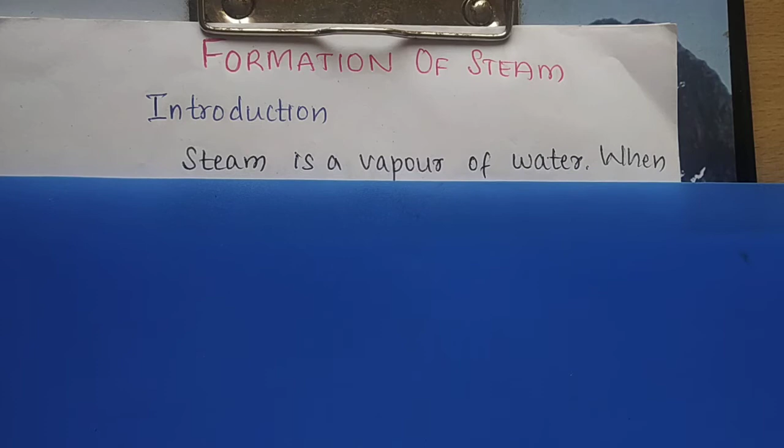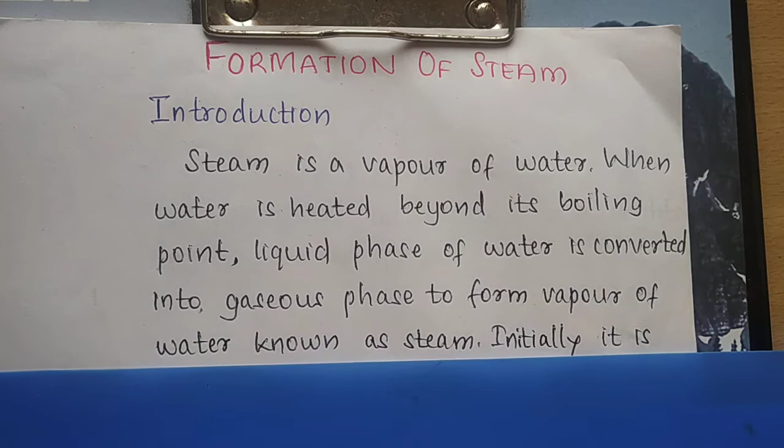Steam is a vapor of water when water is heated beyond its boiling point. If I heat this water beyond its boiling point, the liquid phase of water is converted into gaseous phase to form vapor of water known as steam. So when I heat this water, what will happen? The water is converted into steam.

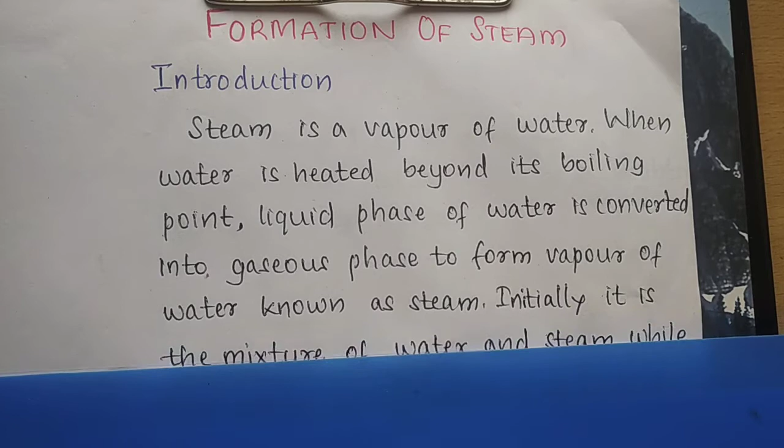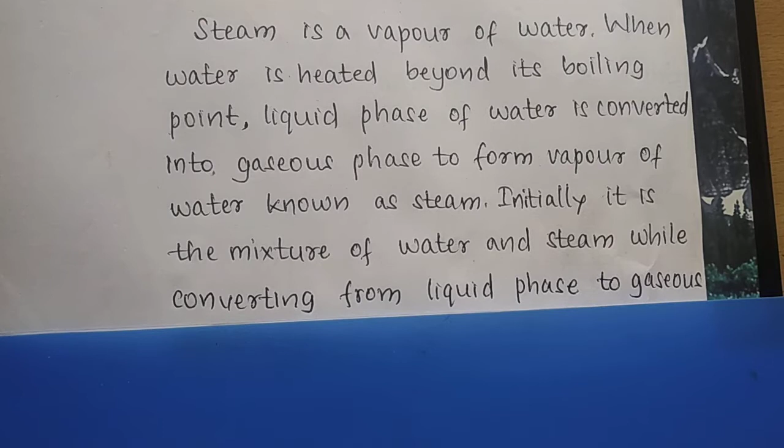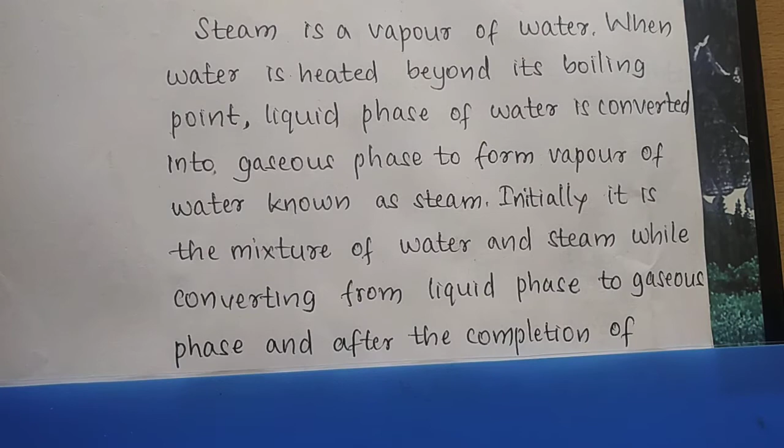Beyond its boiling point, initially it is a mixture of water and steam while converting from liquid phase to gaseous phase. So when converting this water from liquid phase to gaseous phase, initially it exists in both phases, that is water and steam. Then we convert from this mixture of water and vapor into the gaseous phase, that is steam. So converting from liquid phase to gaseous phase, and after the completion of the vaporization process, it exists in pure form - purely in the form of steam.

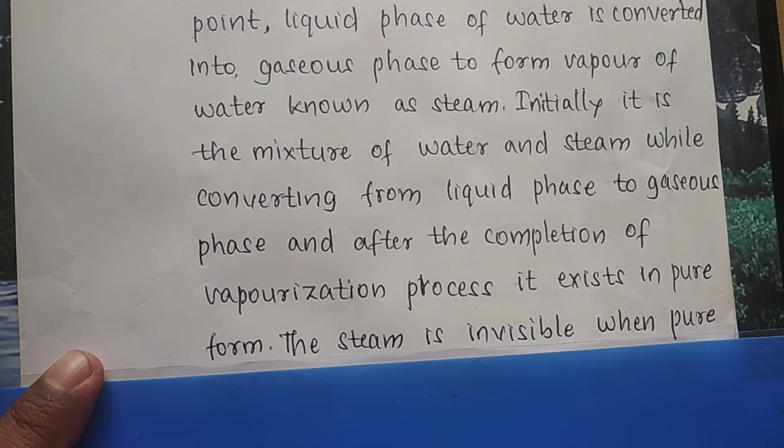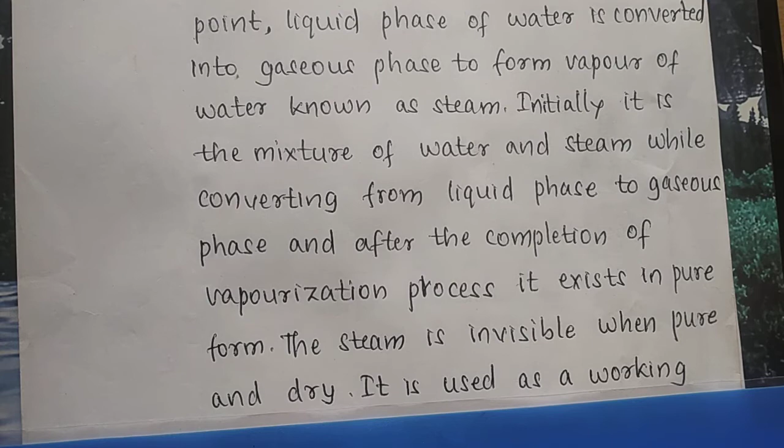The steam is invisible when pure and dry, so we are not able to view it when it is pure and dry. It is used as a working substance in the operation of steam engines and steam turbines.

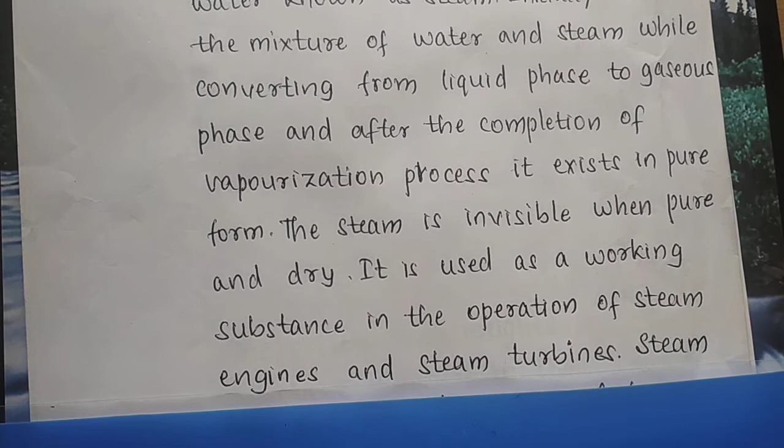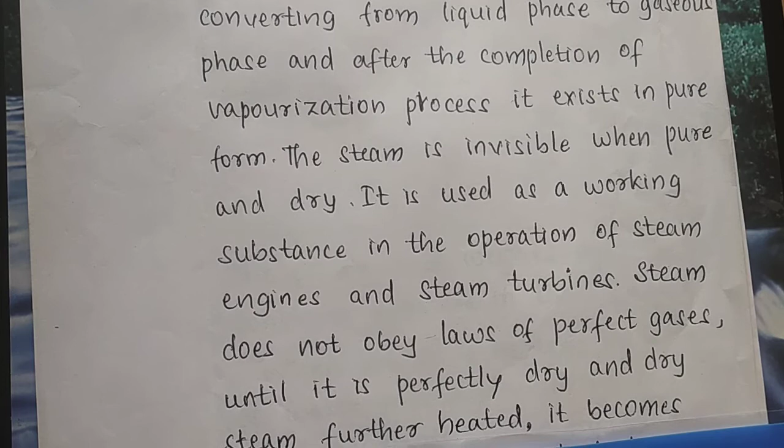Until it is perfectly dry and dry steam is further heated, it does not obey these gas laws. And dry steam, when further heated, becomes superheated vapor, which behaves more or less like a perfect gas.

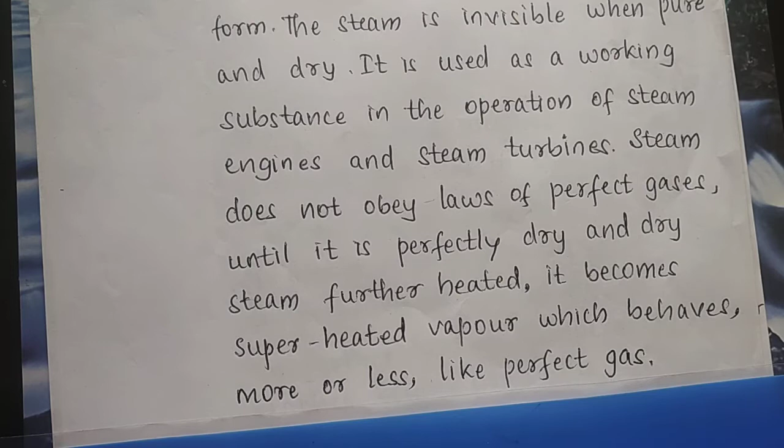Now let us see how steam is formed - formation of steam at constant pressure, or under constant pressure.

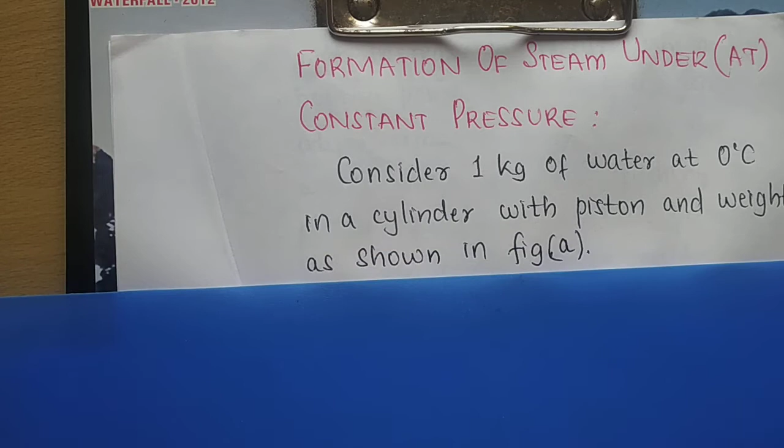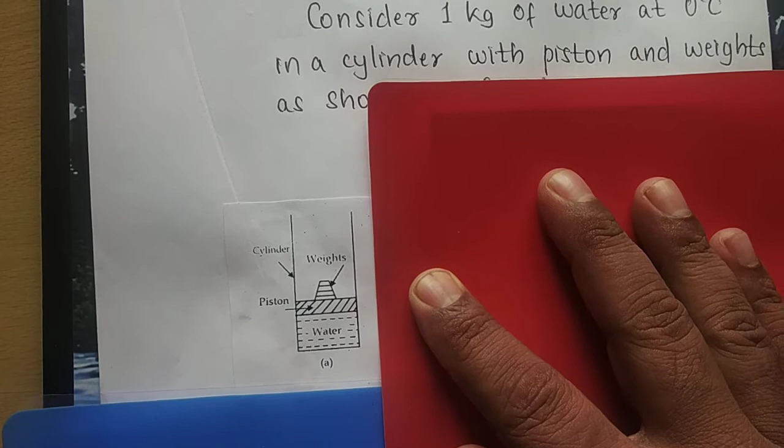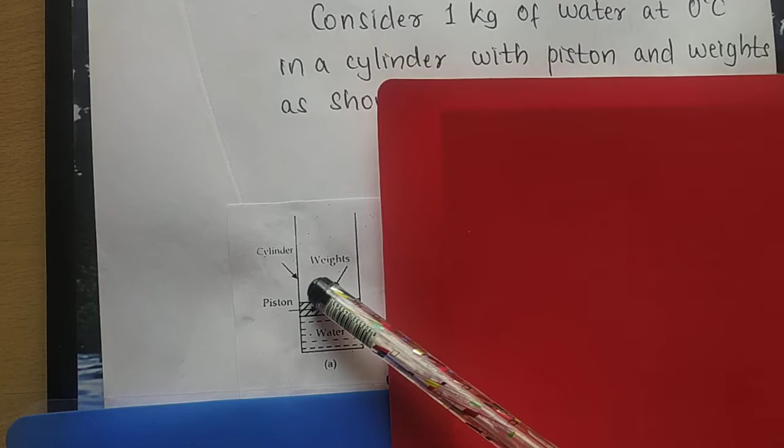So figure A I will show you now. In this figure A, I am showing you all the figures, but let us concentrate only on the first figure. Let us see the first figure now, I will show only this first figure. So I have got 1 kg of water, and this 1 kg of water is filled in a cylinder. A piston is there, weights are applied onto it, so 1 kg of water is filled inside.

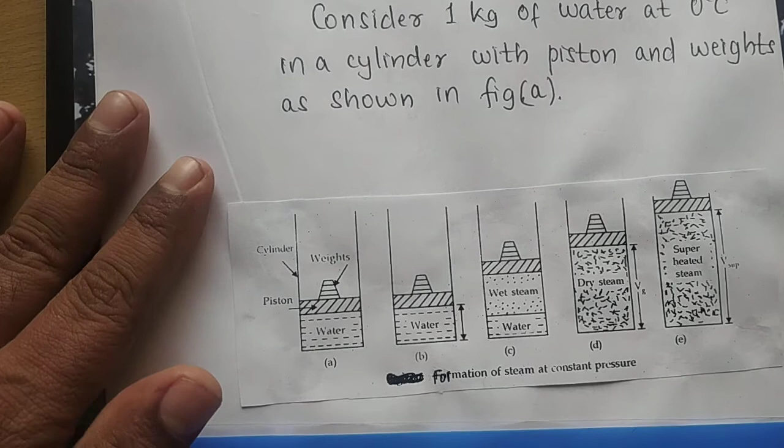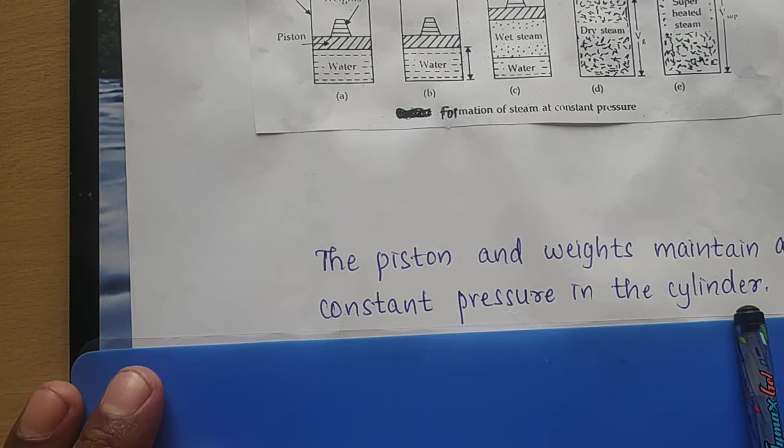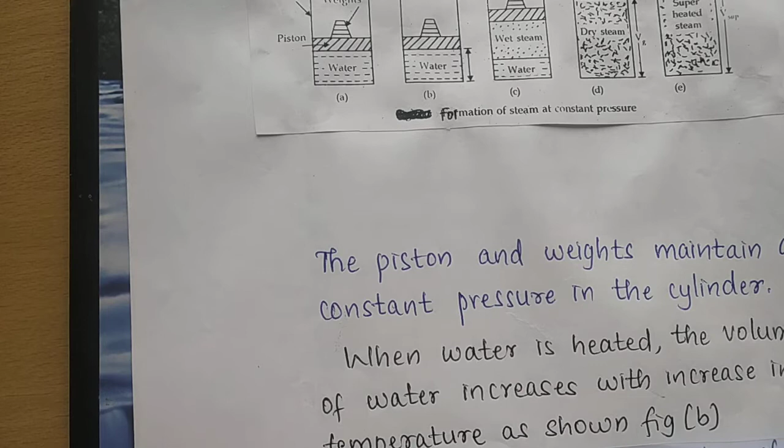So now what do I do to this water, let us see further. The piston and the weights maintain a constant pressure in the cylinder - whatever I am using here is going to maintain constant pressure. When the water is heated, the volume of water increases with increase in temperature, as shown in figure B. I'll take up this figure B later. So now when I start heating this water, what will happen? The temperature of the water increases.

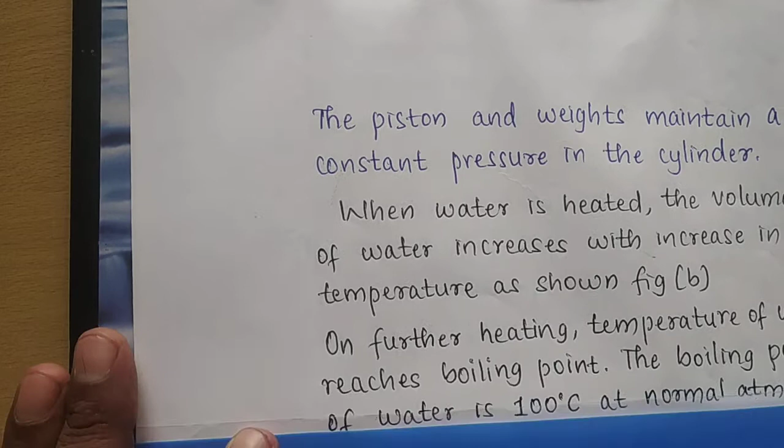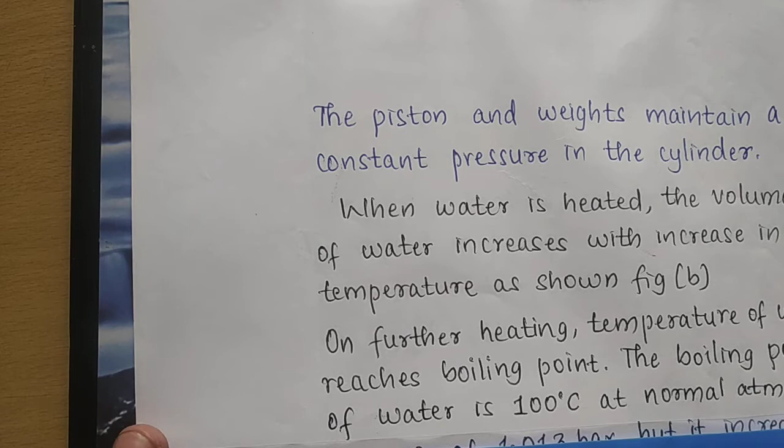On further heating, the temperature of the water reaches boiling point. The boiling point of water is at 100 degree centigrade at normal atmospheric pressure of 1 bar or 1.013 bar, but it increases.

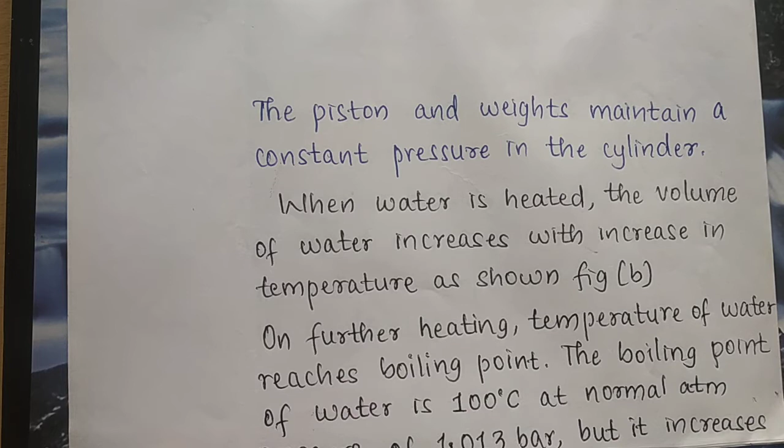At this pressure also you can increase the temperature. So you can see this figure B. As I am heating it, the temperature of the water is increasing and thereby the water is converting into steam, as shown in figure C.

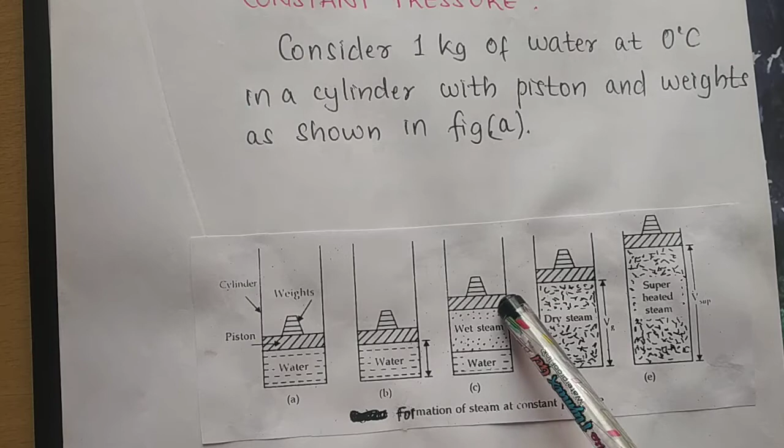On further heating, what happens? The water will start converting into steam. You can see it here. And the piston will start rising upwards because of the pressure exerted by the steam.

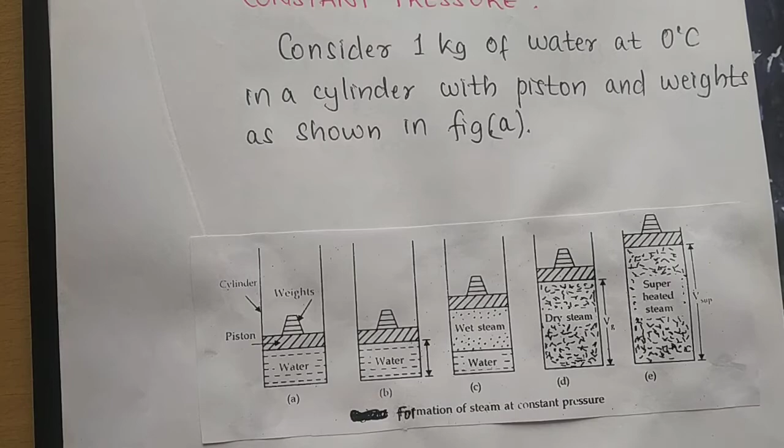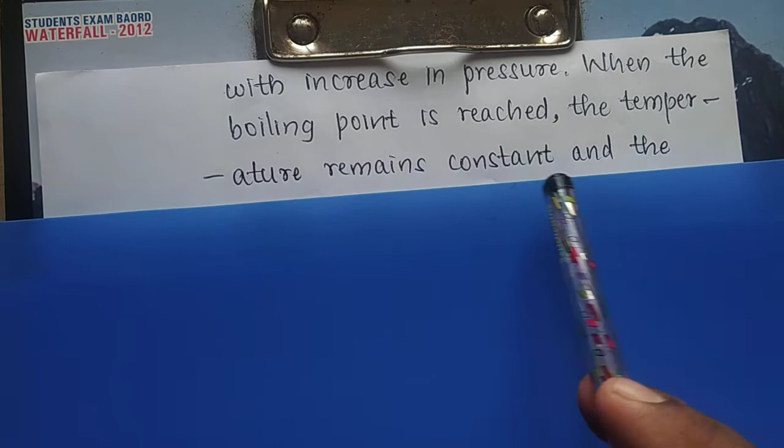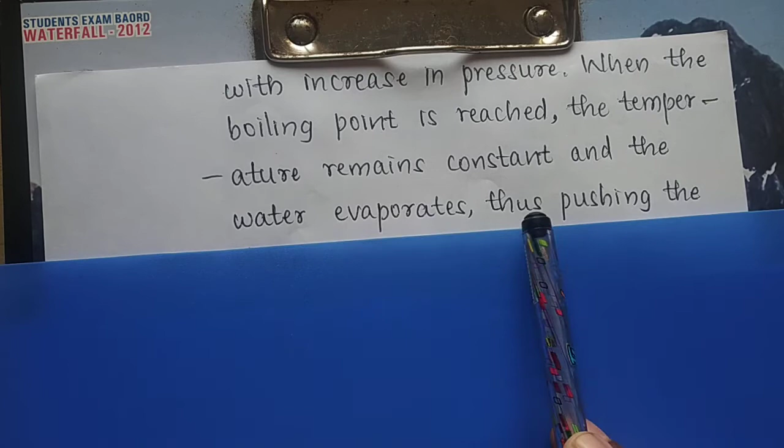With the increase in pressure, when the boiling point is reached, the temperature remains constant. So once the boiling point is reached, the temperature stays constant, and the water evaporates, thus pushing the piston upwards at constant pressure as shown in figure C, by increasing the specific volume of the steam.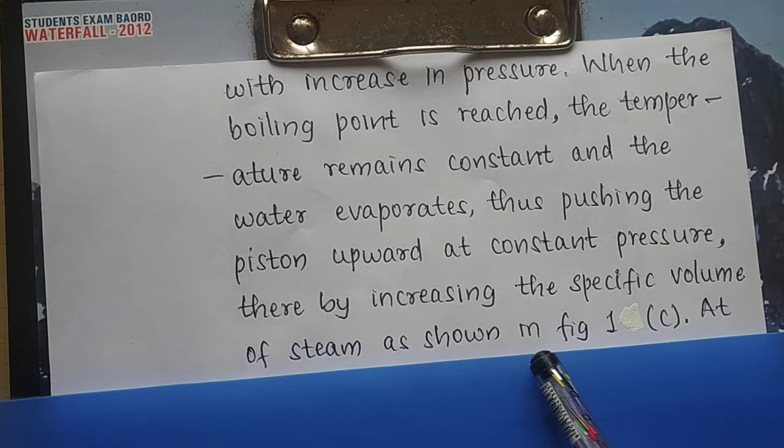So the specific volume of the steam increases. You can see here. So the water is converting into steam and then it is exerting pressure and moving upwards.

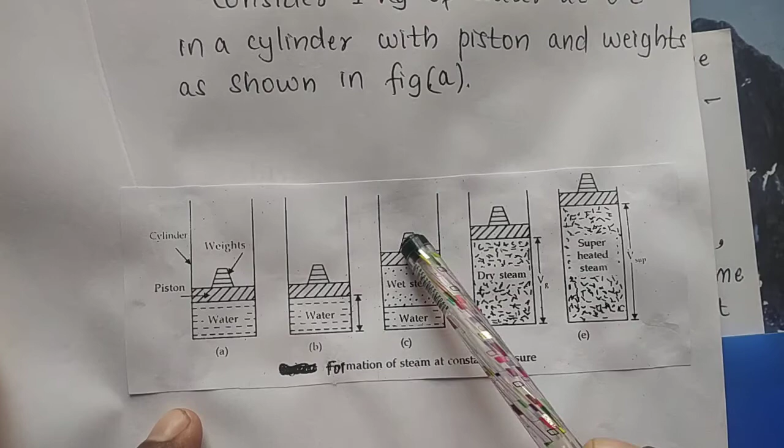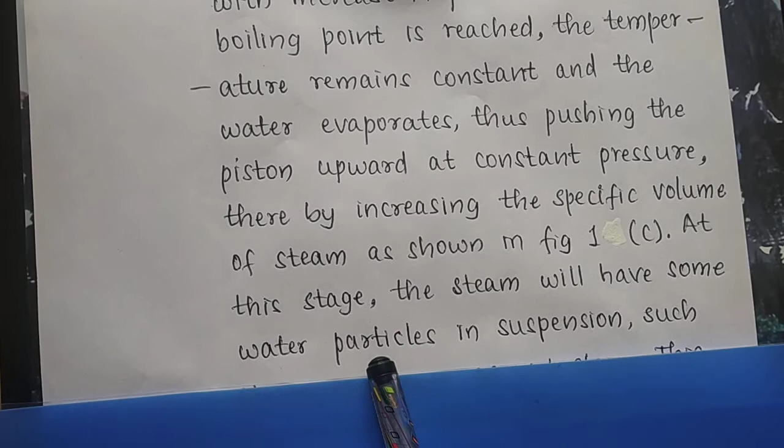At this stage, the steam will have some water particles in suspension. Such steam is known as wet steam. So the steam will contain water particles in it, and therefore we call it wet steam.

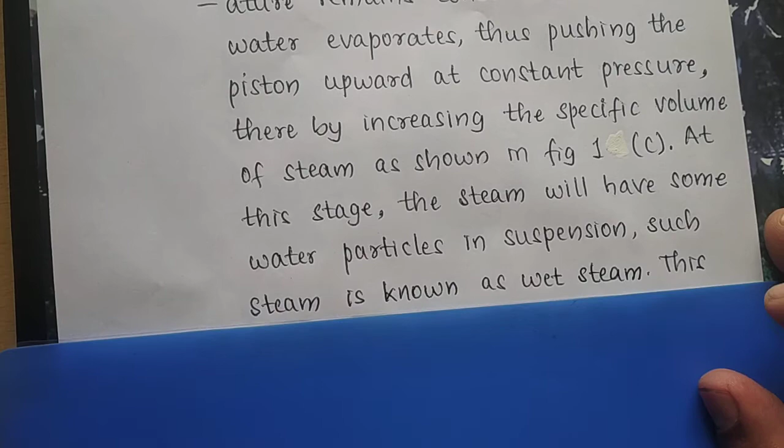You can see here, I'll take the diagram again. In this diagram you can see the water which is converting into steam has water particles in it, so it is called wet steam.

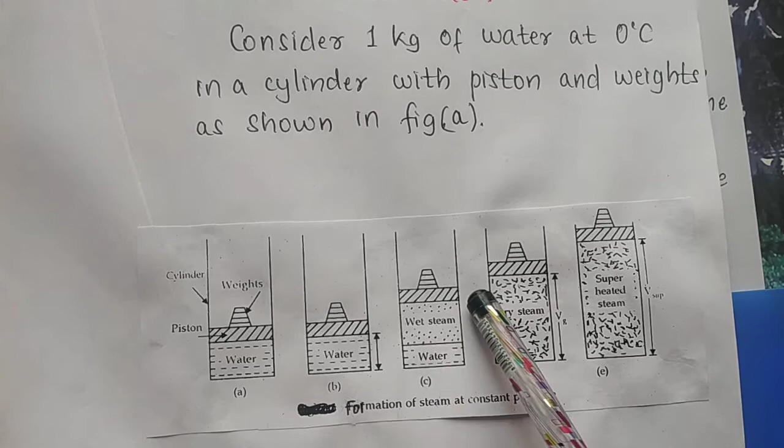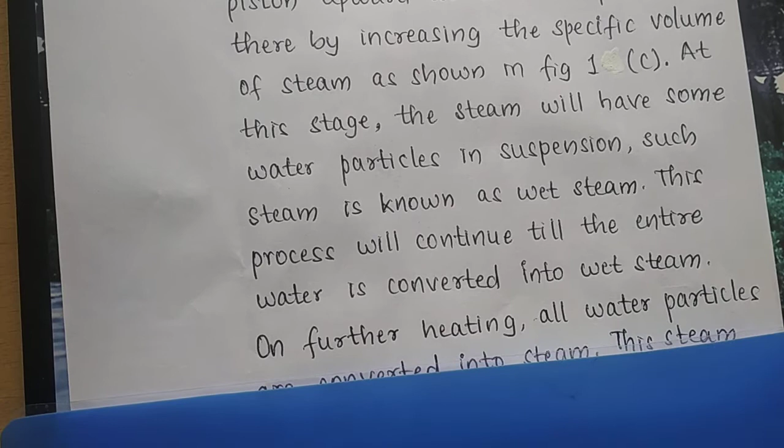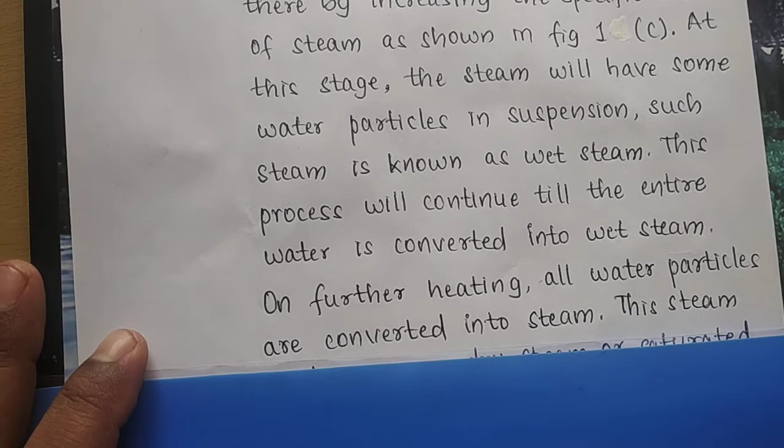This process will continue till the entire water is converted into wet steam. Then, with further heating, all the water particles are converted into steam.

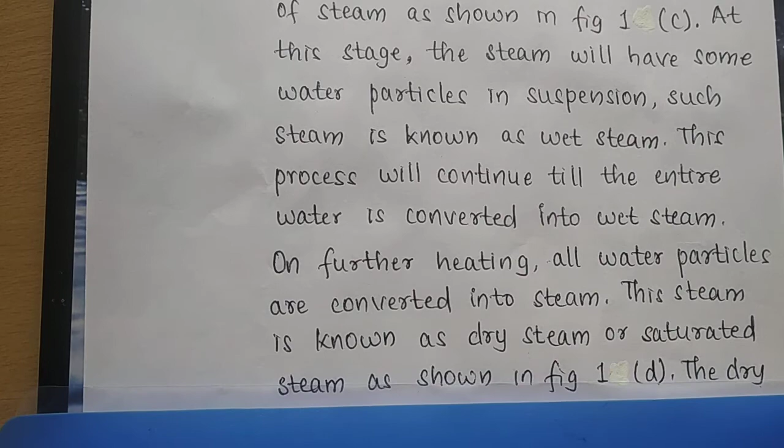This steam is known as dry steam or saturated steam. You can see here again in the diagram. So the wet steam and water, again I am heating this, so everything is converted into wet steam. This wet steam is further heated.

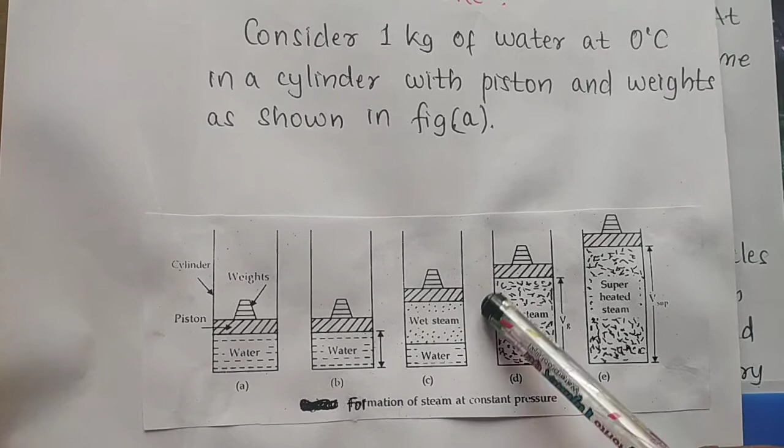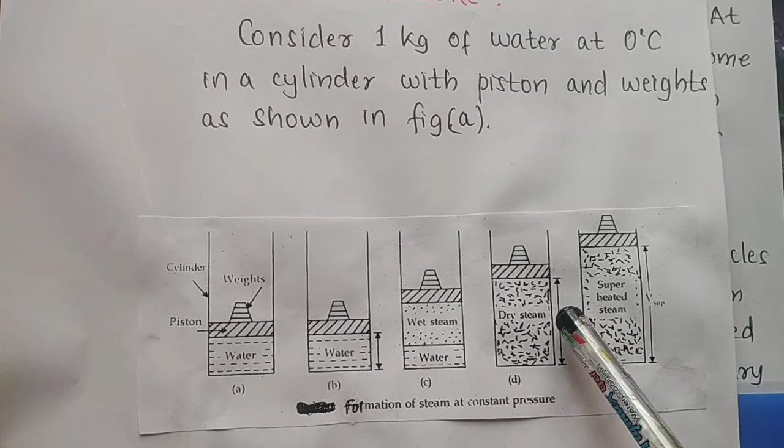What I will get is dry steam or dry saturated steam, the volume of which is given by Vg, the specific volume of dry saturated steam. Thus dry steam behaves like a perfect gas.

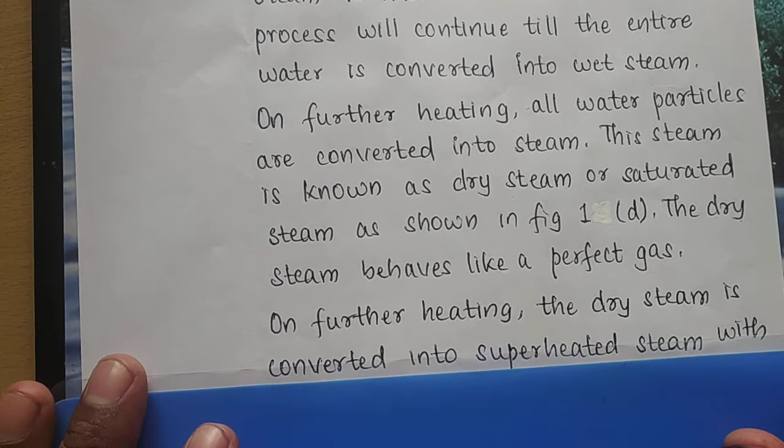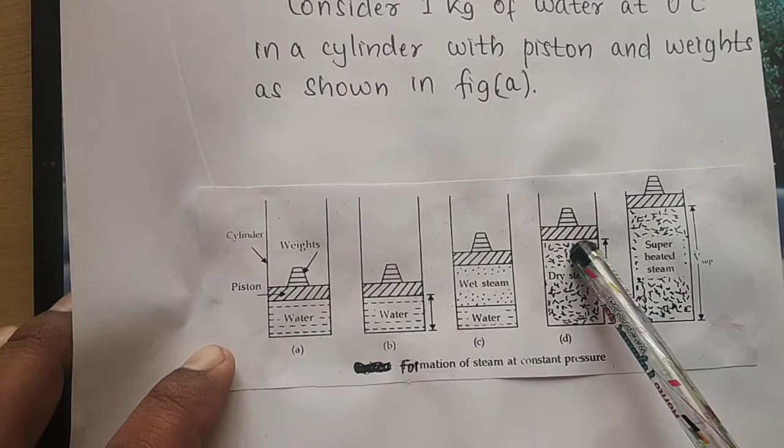On further heating, the dry steam is converted into superheated steam with increase in temperature, as shown in figure E. You can see now again the same diagram. This dry steam, if I further heat it, what happens? Its temperature increases and it is converted into superheated steam.

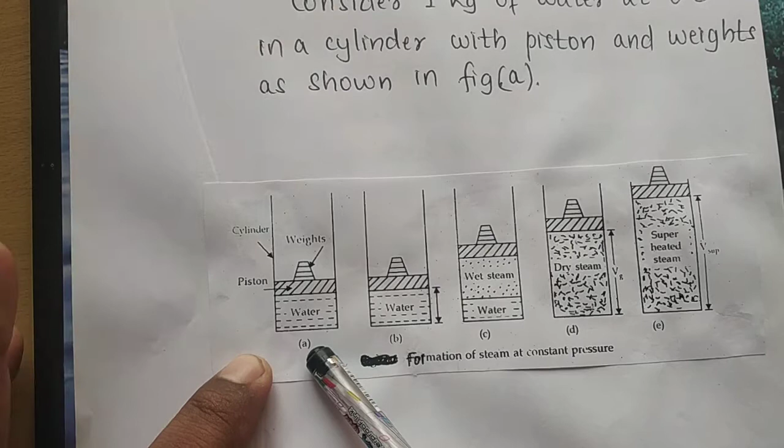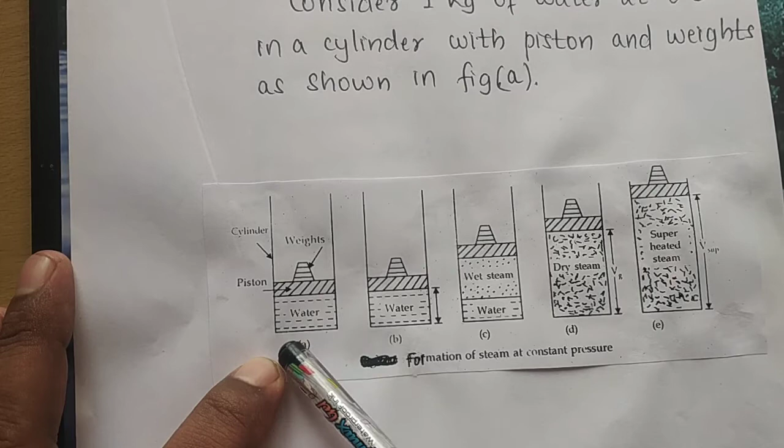So again I'll repeat: the water is taken at 0 degree centigrade at constant pressure, that is atmospheric pressure of 1 bar. If I start heating this water in a cylinder with a piston arrangement, the temperature of the water starts increasing and then this water will reach its boiling point.

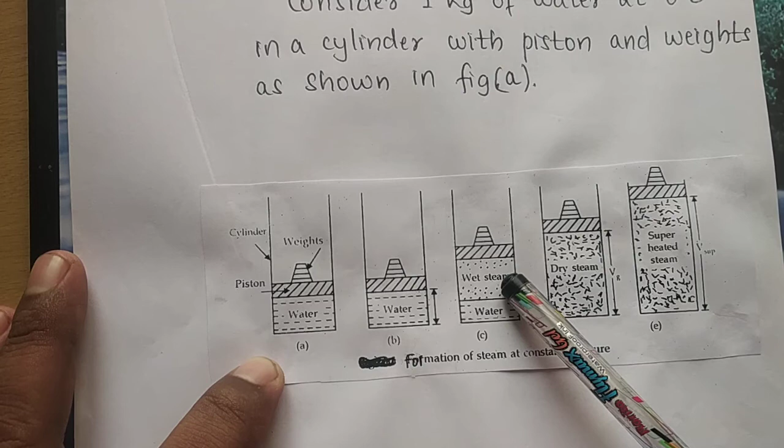So when it reaches its boiling point, if I further heat this water, there will be a change in phase. Water in the liquid state will convert into gaseous state, that is, steam is formed. And the steam which is formed at that juncture is known as wet steam, which contains water molecules in suspension.

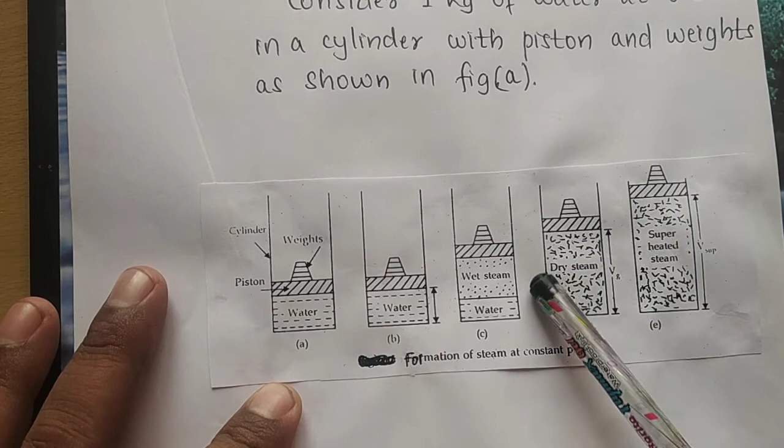If I heat this further, the water is fully converted into wet steam, and this wet steam, when further heated, becomes dry steam or dry saturated steam. We call it dry steam because there are no water molecules in suspension.

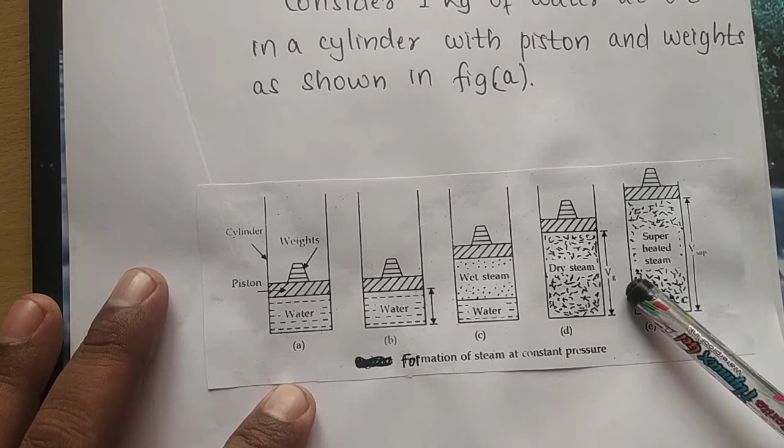And then if I heat this steam further from this boiling point, the temperature of the dry saturated steam increases, which is known as superheated steam. So in the next class, we'll see what are the different types of steams. Thank you.